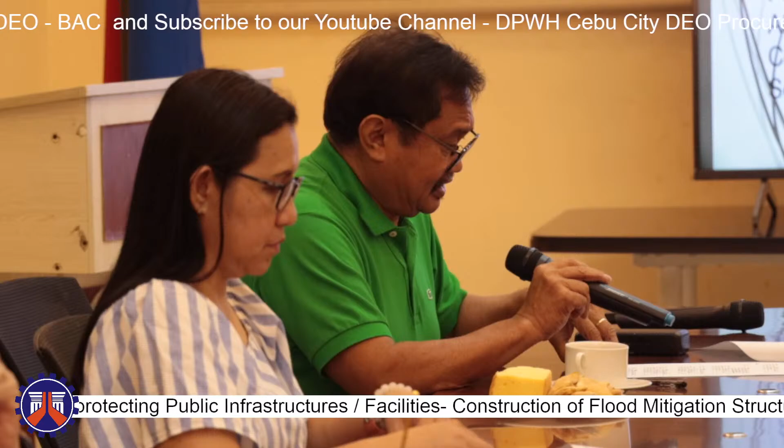Okay, we have the agenda for today. This pre-bid conference today, August 4th, 2023, calls for the one published in our invitation dated July 28, 2023. This involves three flood control and drainage projects comprising contract IDs 23HH0124 to 23HH0126. We also have under item 2, the roads, bridges, and highways, four projects under contract ID numbers 23HH0127, 23HH0128, 129, and 130. These mentioned contract IDs will be discussed individually, contract by contract, by the respective representative from the planning and design section, with the intention of giving further information on the project, while also reviewing the bidding requirements for our proposed bid opening on August 18, 2023. So we may now start with the planning and design section to present the first item under flood control and drainage.

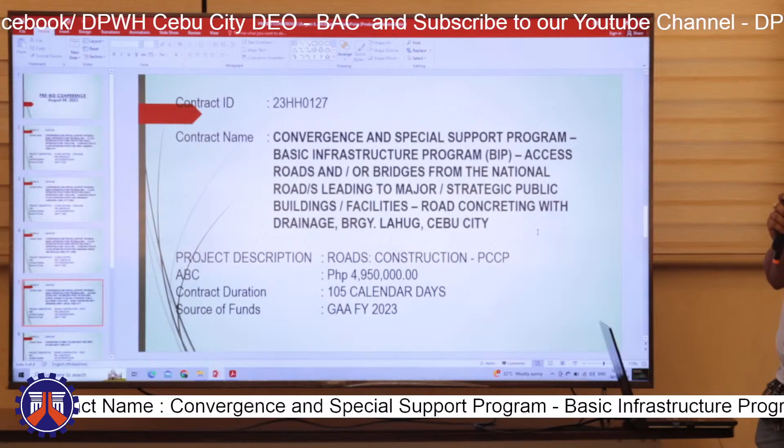Good morning, everyone. I'm Engineer Milo Paulo Raniel from Planning Design. I am tasked to discuss the project ID 23HH0127.

Contract name: Convergence and Special Support Program, Basic Infrastructure Program, Access Roads and/or bridges from the national roads leading to major strategic public buildings and facilities, road concreting with drainage at Barangay Lahug, Cebu City.

Project description: construction of PCCP with ABC, 4,950,000 pesos, with contract duration of 105 calendar days. Let's go to the DED.

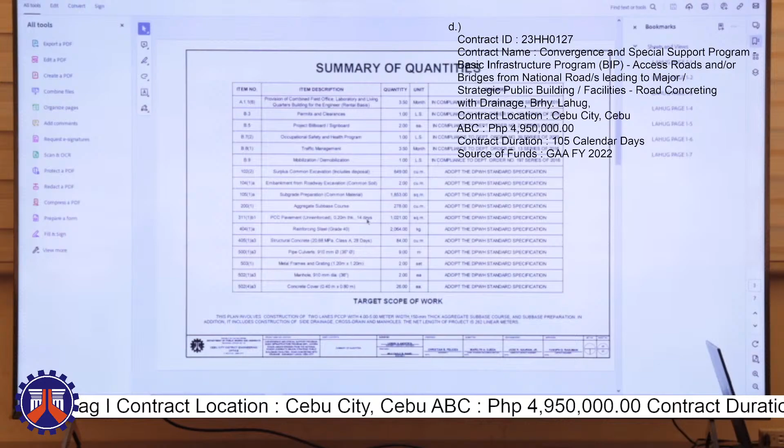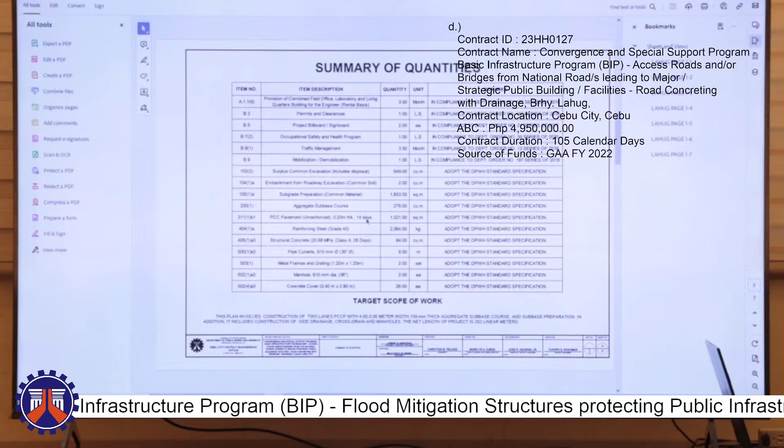For the summary of quantities, we have provision of combined field laboratory and living quarters building for the engineers, then permits and clearances, project billboard and signboard, occupational safety and health program, traffic management, mobilization and demobilization, surplus common excavation including disposal, embankment from roadway excavation, common soil, subgrade preparation, aggregate sub-base course, and PCCP pavement unreinforced 0.2 thick for 14 days, then reinforcing steel, structural concrete 20.68 megapascal class A for 28 days, then pipe culverts, metal frames and gratings, manholes, and concrete covers.

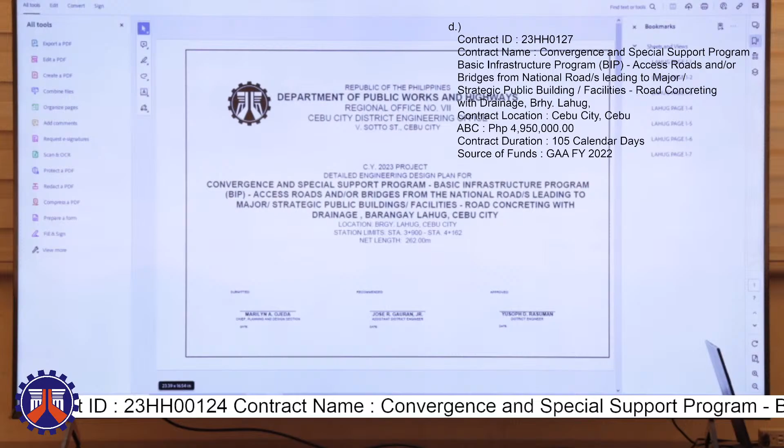For contract ID 23HH0128, contract name: concreting of Barangay Pulang Bato FMR, Barangay Pulang Bato, Cebu City. Project description: road construction, PCCP, with ABC of 11,940,000 with contract duration of 180 calendar days.

For Pulang Bato, it has a net length of 573 meters.

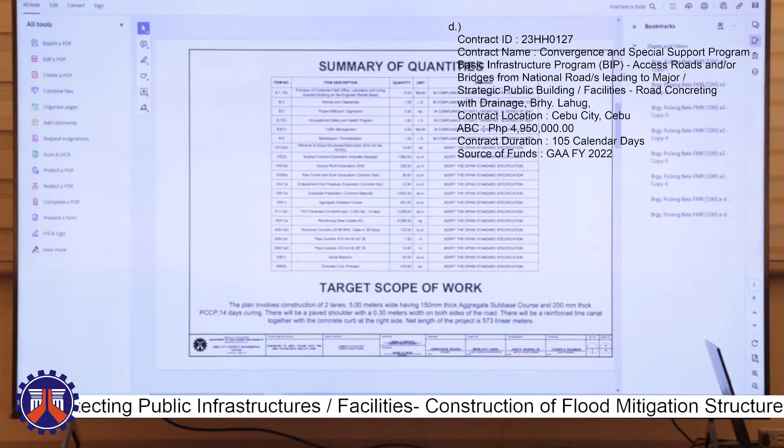For the summary of quantities, we have provision of combined field office, permits and clearances, project billboard and signboard, occupational safety and health program, traffic management, mobilization and demobilization, removal of actual structure or obstruction, then surplus common excavation, surplus rock excavation, then pipe, culvert, and drain excavation, embankment from the roadway excavation, subgrade preparation, aggregate sub-base course, PCCP pavement with thickness of 0.2 meter, 14 days curing.

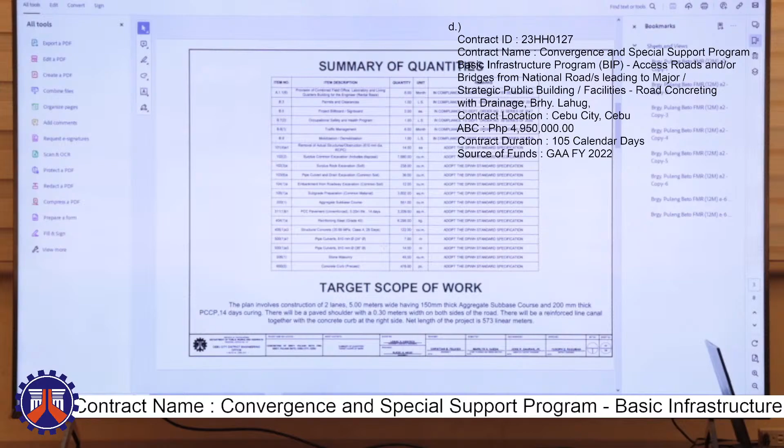Then reinforcing steel, structural concrete, pipe culverts, 610 mm diameter and 910 mm diameter. It also has stone masonry and concrete curb precast.

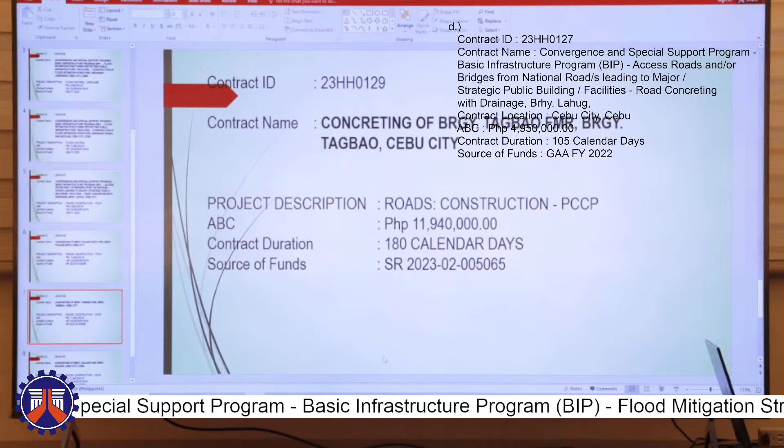Good morning, everyone. For now, I will discuss the contract ID 23HH0129, contract name Concreting of Barangay Tagbao FMR, Barangay Tagbao, Cebu City. This is a road construction of PCCP with ABC of 11,940,000 with contract duration of 180 calendar days.

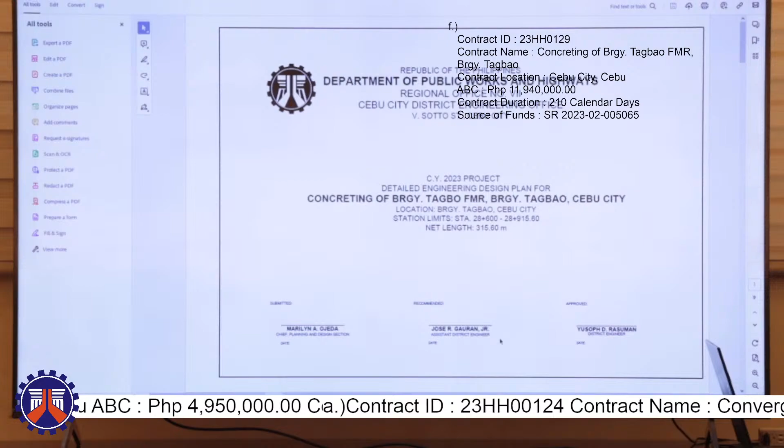The net length of this project is 315.6 meters with station limits from station 28 plus 600 up to 28 plus 915.6. This one is connecting to the existing concrete and will end near the Mangabon Elementary School. We have here the project location, the coordinates for your reference.

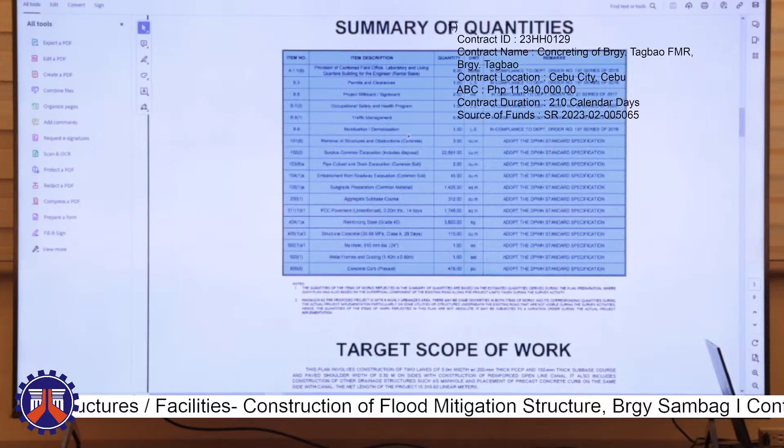For the summary of quantities, we have here the provision of combined field office, laboratory, and living quarters, building for the engineer, permits and clearances, project billboard, signboard, occupational safety and health program, traffic management, mobilization, demobilization, removal of structures and obstructions, concrete, surplus common excavation which includes disposal, pipe culvert and drain excavation, common soil, embankment from roadway excavation, subgrade preparation, aggregate subbase course, PCCP of 0.20 thick and 14 days curing.

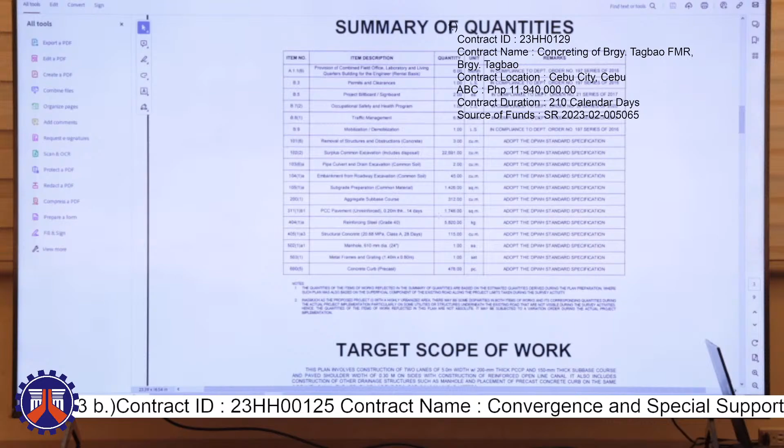Reinforcing steel, grade 40, structural concrete 20.68 MPa, class A 28 days, manhole 610 millimeter diameter, metal frames and grating 1.4 by 0.8 meter, and concrete curb precast.

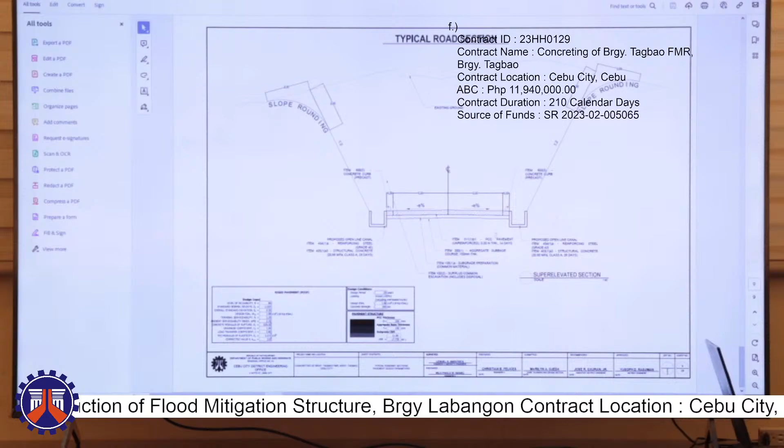For the typical cross-section of this project, this is the typical road section with open line canal on both sides with concrete curb on the same side, and a major cut for the project. So that's it for Tagbao FMR.

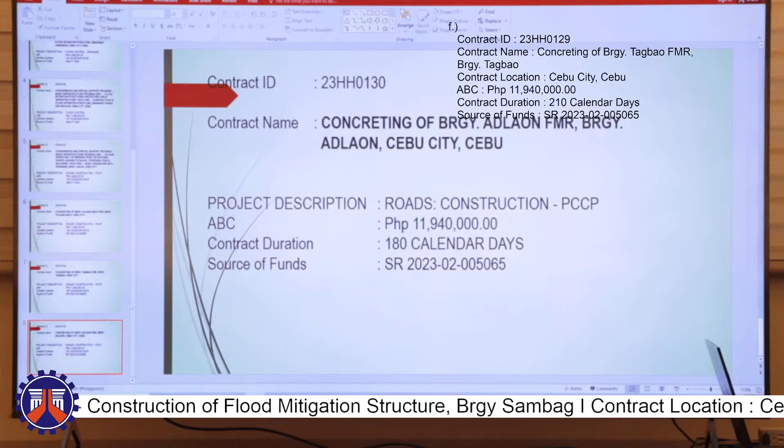Good morning, everyone. I'll be discussing the next project with contract ID 23HH0130 with contract name Concreting of Barangay Adlaon FMR, Barangay Adlaon, Cebu City, Cebu, with an ABC of 11,940,000. Contract duration of the project is 180 calendar days.

Next, I'll be discussing the DED plan. For this project, the station limits is 23 plus 781 to 24 plus 440 with net length 659 linear meters.

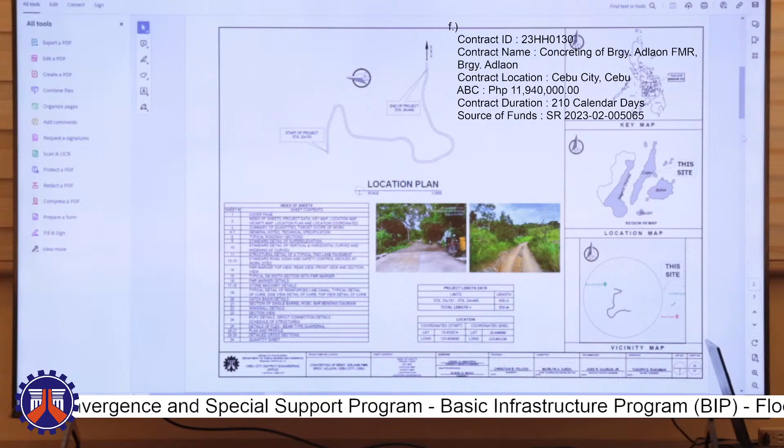The start of the project will be the continuation of the previous FMR. This is the start of the project, with coordinates of the start and end.

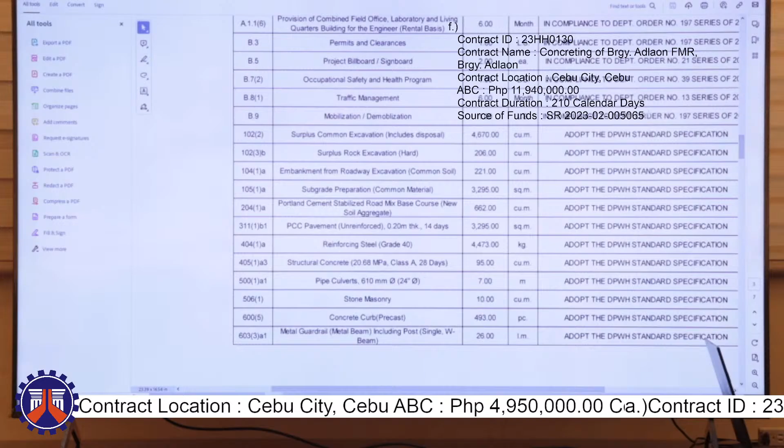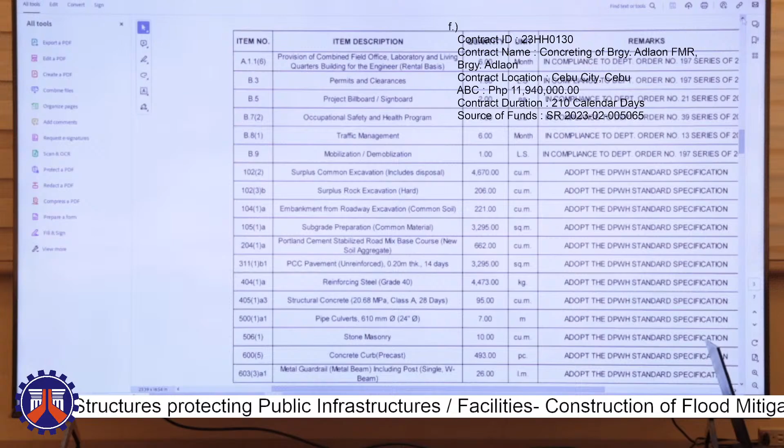So for the items of work, the project includes provision of combined field office, laboratory, and living quarters building for the engineer on rental basis, permits and clearances, project billboard, signboard, occupational safety and health program, traffic management, mobilization, demobilization, surplus common excavation including disposal, surplus rock excavation hard, embankment from roadway excavation common soil, subgrade preparation common material, Portland cement stabilized road mix base course, new soil aggregate, PCCP pavement unreinforced 0.2 meter thick, 14 days, reinforcing steel grade 40, structural concrete, pipe culvert 610 for the cross drain, stone masonry, concrete curb precast, and metal guardrail.

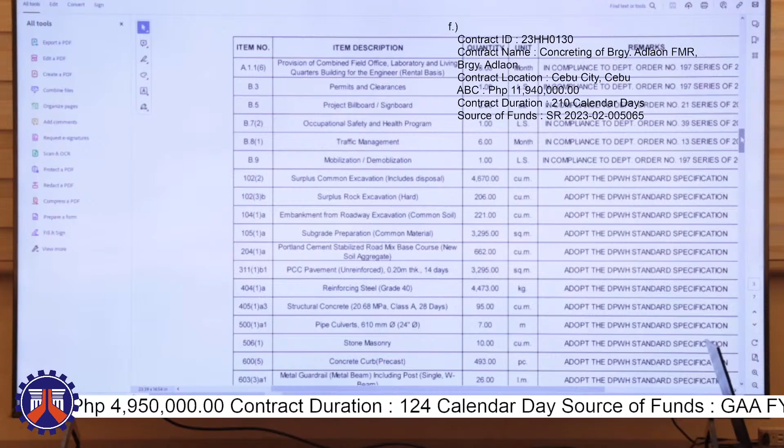So here is the scope of work of the project. So next.

So the contract duration of the project is 210 days. For the permits and clearances, there is an allotted 45 days.

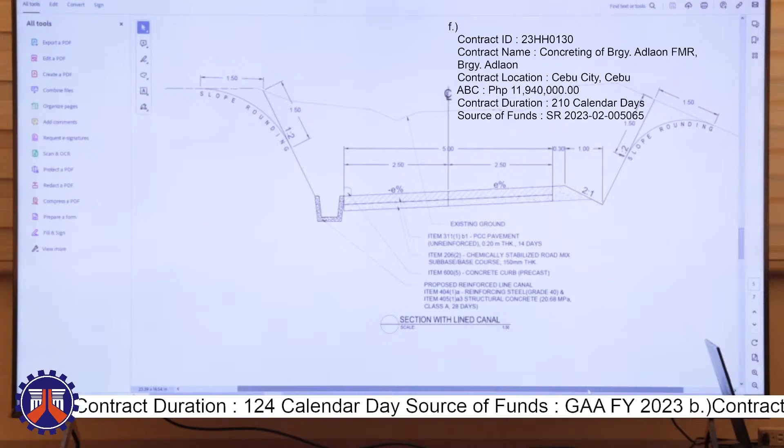Next is the typical road section of the project with 5 meters carriageway width. This is the section with line canal on the left side. As you can see, the cut slope in the project should have a slope rounding on both sides.

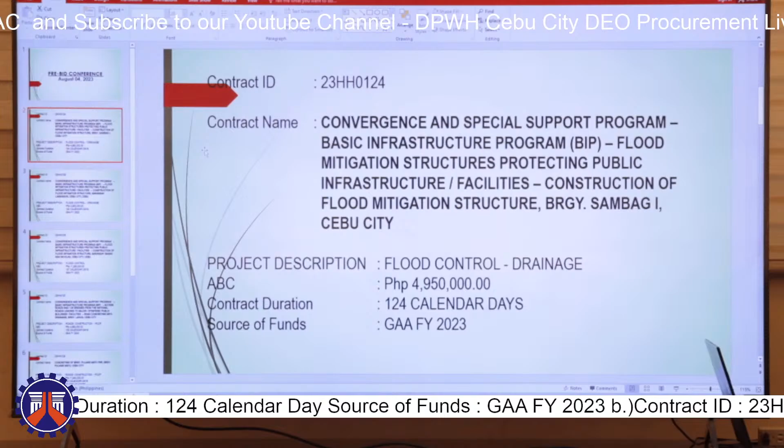Good morning, everyone. So to discuss the drainage projects, let's start with contract ID 23HH0124, contract name: Convergence and Special Support Program, Basic Infra Program, Flood Mitigation Structures Protecting Public Infrastructure Facilities, Construction of Flood Mitigation Structure, Barangay Sambag Uno, Cebu City. We have an ABC of 4.95 million and a contract duration of 124 calendar days.

So for the next pre-bid, planning will take down notes on the comment of our chairman regarding the breakdown of our contract duration. But for the bidders' information, planning and design section has a basis for computing the contract duration or calendar days of each project. We have a department order that states the category of each project, so for road, here's how we compute it.

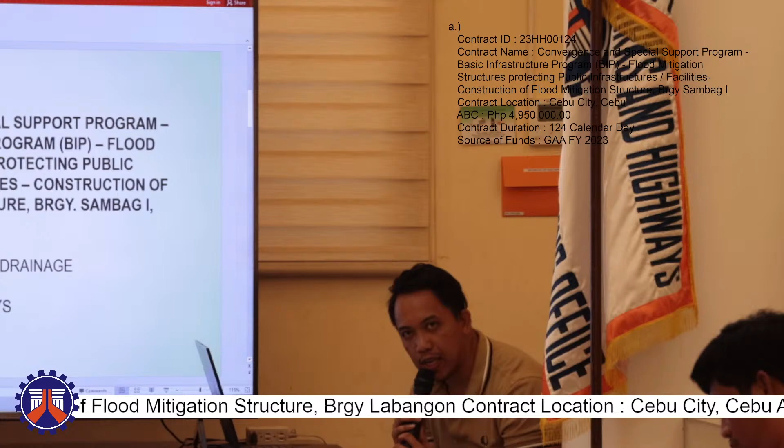So for the first project, Sambag Uno. Okay, let me open the DED plans for this project.

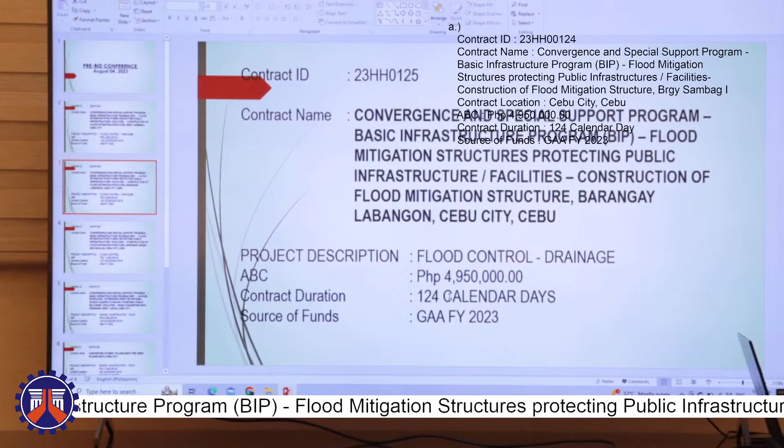Next one is the same category, BIP, basic infra program, but a different location - construction of flood mitigation structure in Barangay Labangon, Cebu City. Same contract duration with an ABC of 4.95 million.

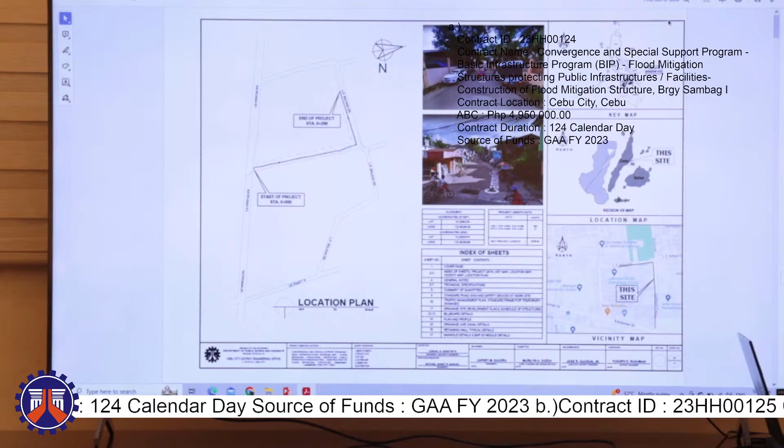Then the second site has a damaged revetment, so we will be repairing it. It's a short area, only about 20 meters.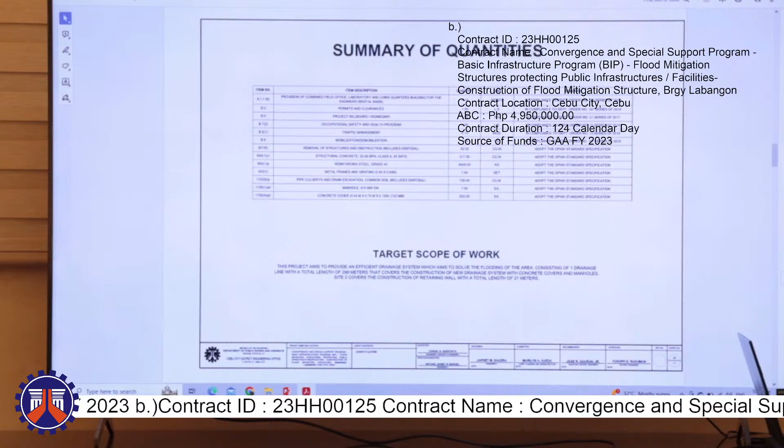The components of the drainage and retaining wall are structural concrete and reinforcing steel, then metal frames and gratings, then excavation for the manhole. We didn't include stone masonry since concrete is more preferred in this area, so concrete is what we'll use.

There's also the schedule of structures and its direction of flow, and we have the profile. There's no problem since it slopes downward. For the tributary area, we've indicated the retaining wall height required, or the existing structure we need to prepare.

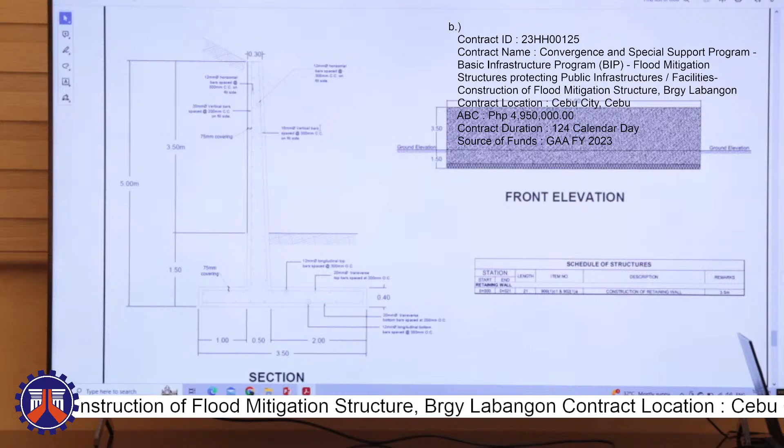That's it for Barangay Labangon.

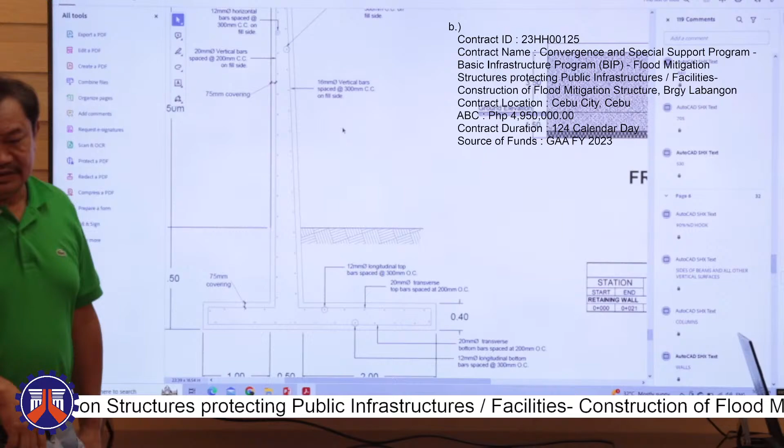Okay, sir. Sige, sir. Okay, sir. Yes, sir, it's connected. Noted, sir.

On the retaining wall.

So to proceed with the next one, the last drainage project is the same category but a different location - construction of flood mitigation structure, Barangay Basak, San Nicolas, Cebu City, with a contract duration of 187 days and an ABC of 11.88 million.

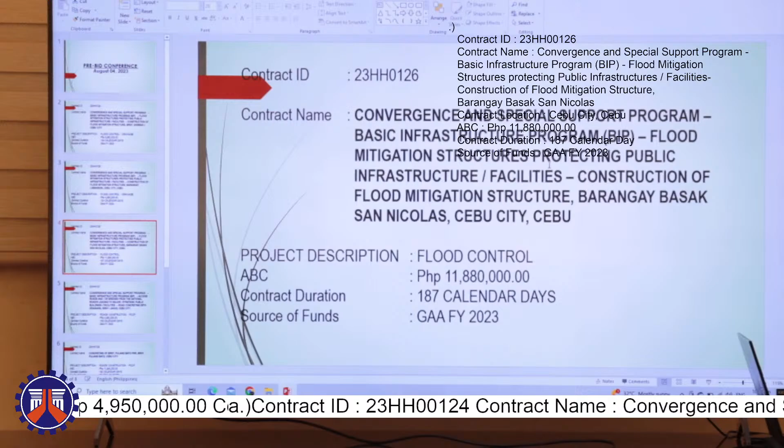This is just one location, our Basak San Nicolas. If you're familiar with our barangay hall, the area is close by. There's a school there, Rizwoods College, near Cabreros Street. The outfall leads toward the SRP.

So it's just a box culvert for this one. The difference is only in the profile design, but the section is more likely just one typical section, a box culvert type. We have identified the outfall, which is existing and was constructed by the LGU.

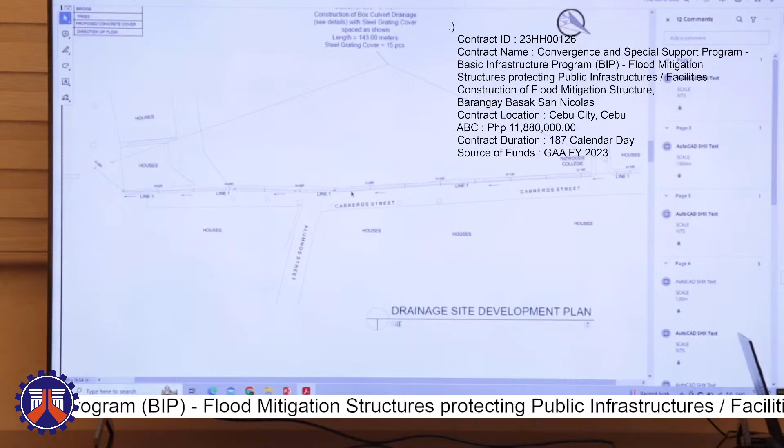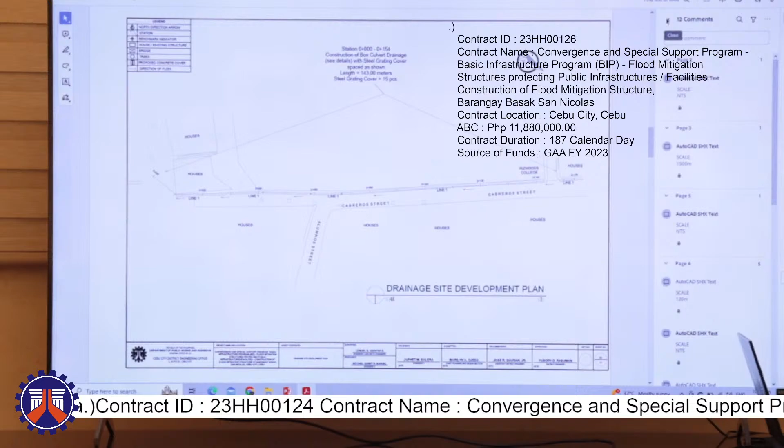The details we added that weren't reflected in the master plan are our manholes, whether we need to place further ones on the sidewalk or not, and to improve the laterals - the connecting drainage lines. We also appealed to improve and ready our junctions or intersections for future connections by the LGU, as per our agreement that we would build the drainage mains to accommodate the runoff, since the drainage area here is quite large.

This one, sir, is 1.2 by 1 meter. Yes sir, the clear dimension is 1.6 by 1.36. It's still a box culvert type since it will be exposed to vehicles.

Because the area is constricted. We have no budget for the right of way, so we'll maintain the existing carriageway width.